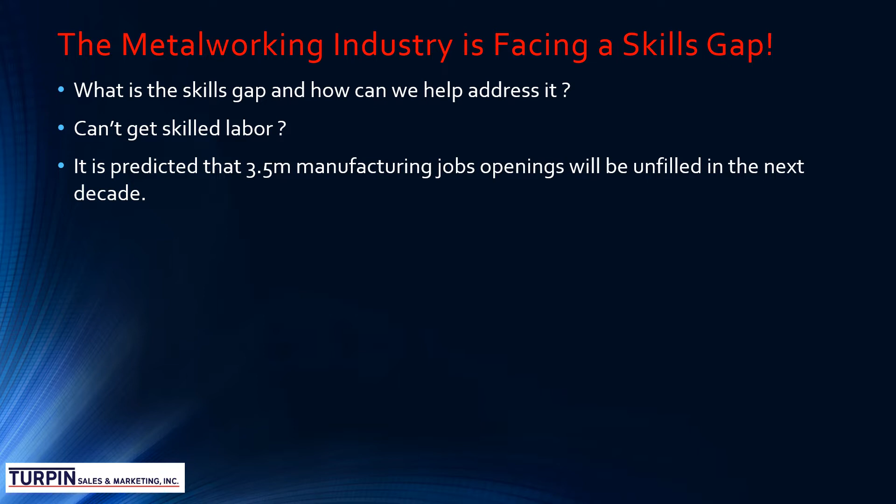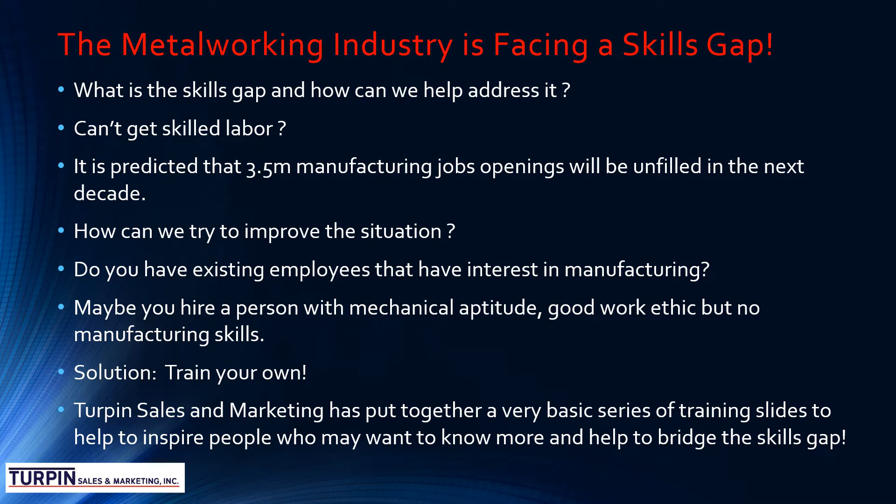It's predicted that 3.5 million manufacturing jobs will be unfilled in the next decade, which will be devastating for this industry. So what can we all do to improve this situation? Do you have existing employees that have an interest in manufacturing? Maybe you hire a person with mechanical aptitude, good work ethic, but no manufacturing skills. So what's the solution? Train your own. So Turpin Sales and Marketing have put together a very basic series of training presentations to help to inspire people who may want to know more about this industry and help to bridge the skills gap.

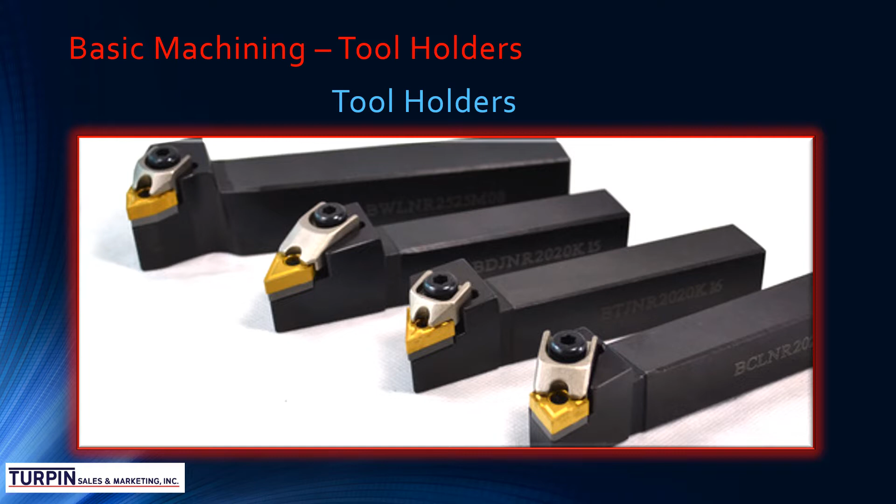Today we're going to cover tool holders, primarily lathe tool holders that fit into either a tool block or a turret block. As you can see in the picture, most of them are square shank, and we'll go into more detail on the next slide.

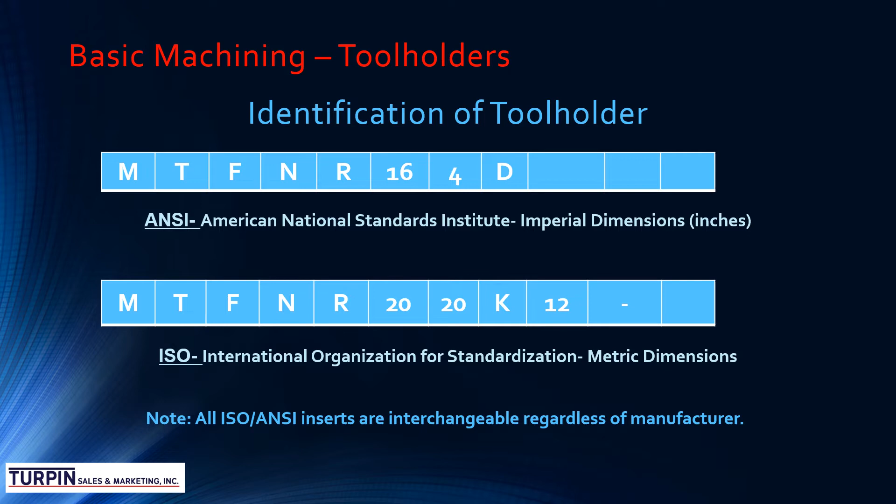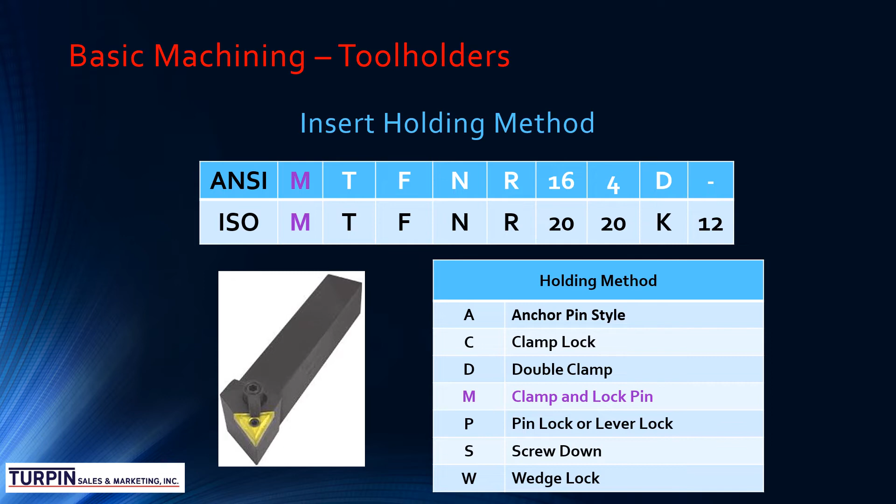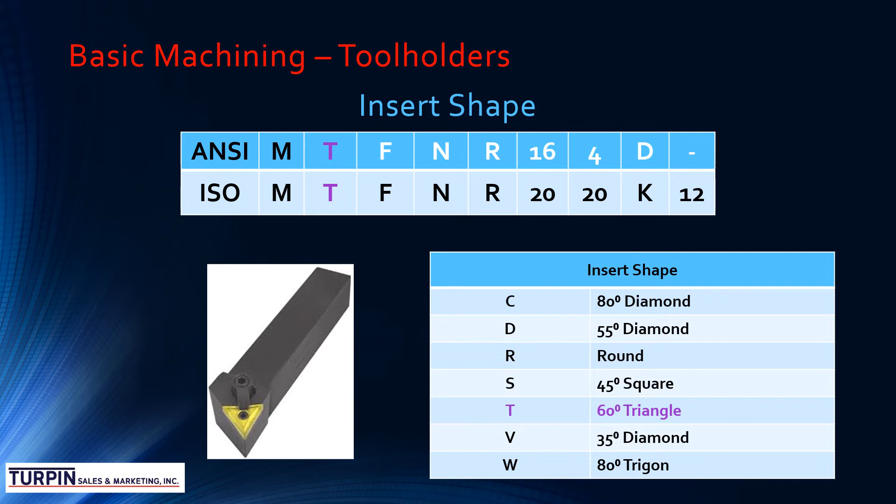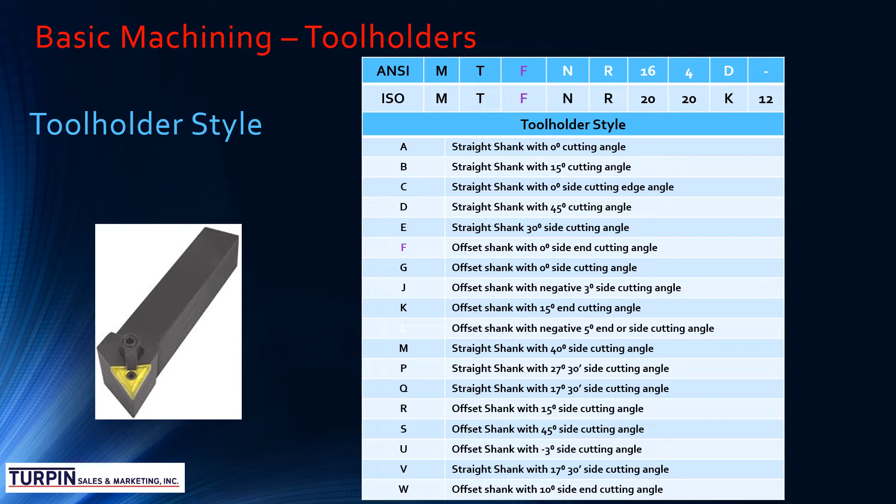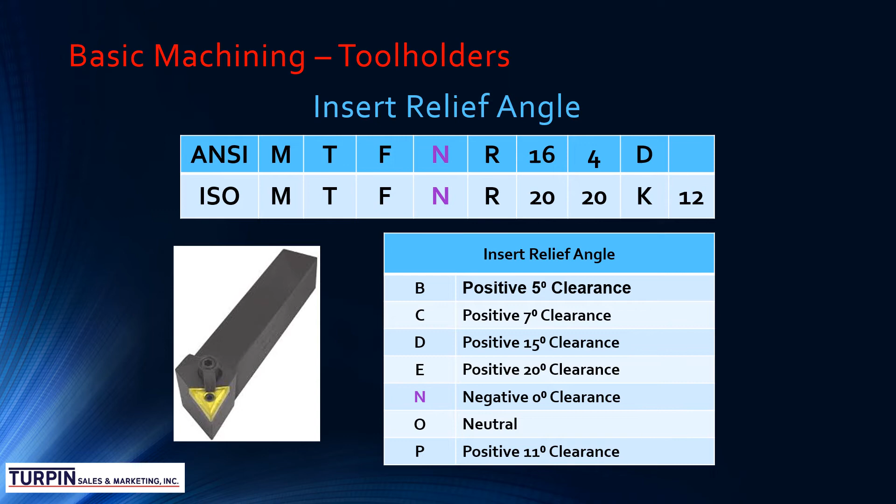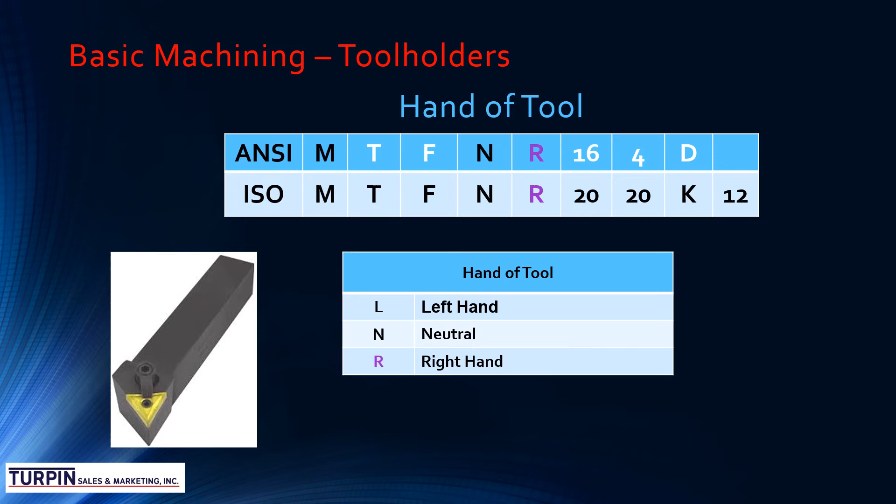When we get to the ANSI, the first number describes the shank, the 16. That is based on 16ths of an inch. So 16 16ths of an inch is 1 inch. So that would be a 1 inch square shank. The next number, the 4, actually describes the inscribed circle of the insert, and this is in 1/8 increments. So 4 1/8 is a ½ inch, so that would take a ½ inch IC insert.

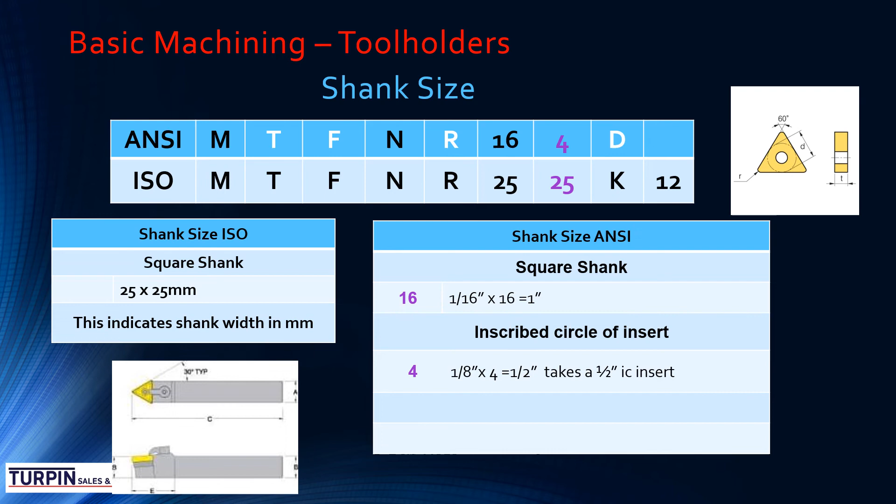Again, I'll go over that. The 16 is 16 in increments of 1/16 of an inch, so that is a 1 inch square shank. And the 4 is in increments of 1/8 of an inch. So 4 1/8 of an inch is ½ an inch, and it takes a ½ inch IC insert. If you look at the ISO, the last number there is a 12. That actually describes the inscribed circle for the ISO. So 12 is a 12 millimeter IC insert.

So that concludes the nomenclature for both ANSI and ISO. So next time you're on the shop and you look at a square shank cutting tool, you can determine the major dimensions, the major clearance angles, which inserts it takes, all from reading the code.